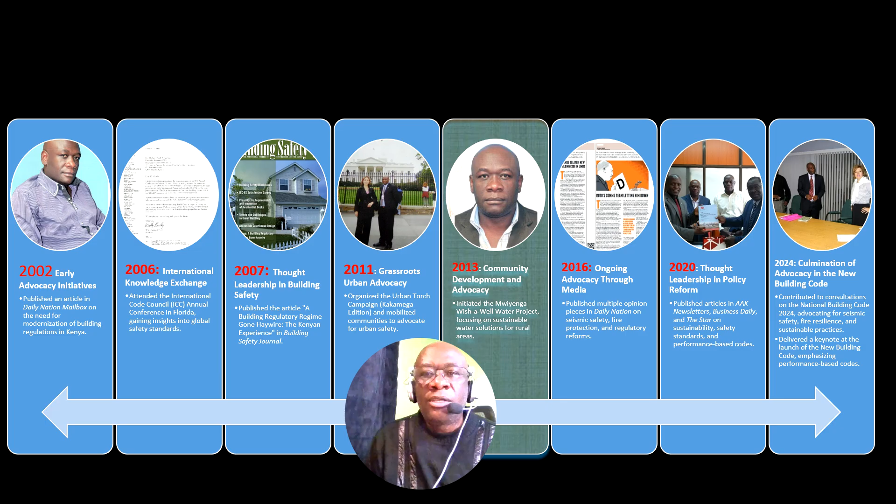Locally, I've been at the forefront of grassroots advocacy, and in 2011, alongside my friend Humphrey Buradi, we launched the Urban Torch campaign in Kakamega to promote urban development awareness. I also co-founded the Mwiyenga Wish-a-Well Water Project, a community-driven initiative that has received recognition and support from the ICC's Global Membership Council.

Over the years, I've published multiple opinion pieces in leading Kenyan outlets such as the Daily Nation, Business Daily, and The Star, covering topics like sustainability, safety standards, and building codes. My contributions extend to AAK newsletters and participation in stakeholder forums for the upcoming National Building Code 2024, led by the National Construction Authority. These experiences reflect a lifelong commitment to fostering a safer, more sustainable, and forward-thinking built environment in Kenya.

As we proceed, I'll share insights from this journey that tie into the transformative potential of the National Building Code.

So, what are the highlights in the new code? This new code aims to align Kenya's construction industry with global best practices, promoting sustainable and climate-resilient urban development. It incorporates eco-friendly materials and methods while addressing climate resilience, with provisions for seismic safety and adaptable designs to withstand climate impacts. The code also integrates high-standard international building practices, with periodic updates to stay current with global trends.

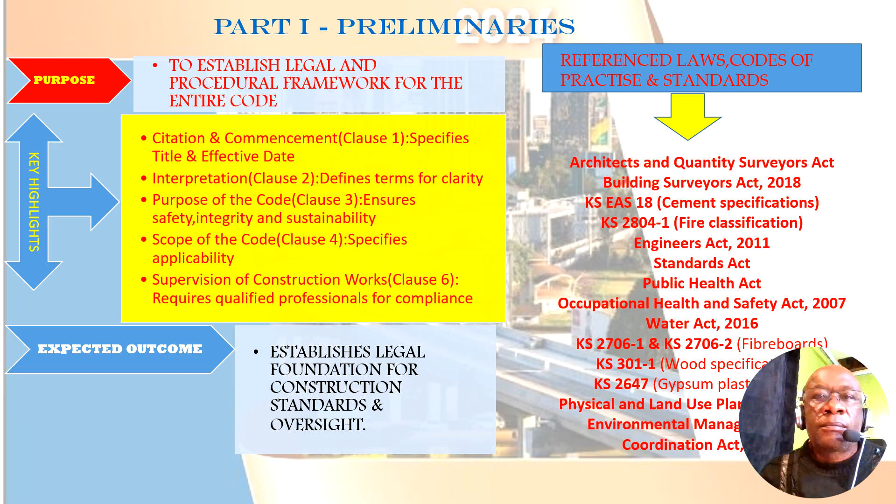Siting and space about buildings.

The 1968 code provided limited guidelines for site selection and spacing. In contrast, the 2024 code introduces zoning principles, environmental impact assessments, and disaster risk considerations, ensuring optimal land use and sustainable urban planning. Key regulations promote organized urban development and safety, compliance with physical planning at Clause 7, ensuring adherence to urban standards.

Space around residential buildings at Clause 14 safeguards privacy and air circulation. Service areas at Clause 11 allocate space for utilities. Obstruction of view at Clause 13 prevents sightline blockages. Building safety at Clause 33 eliminates hazards to the public.

There are standards like KS 548 for precast pipes, KS 2112-1 for electrical installation and security installations, and KS 2112-2 for access control and non-lethal security fences, enhancing infrastructure safety and efficiency.

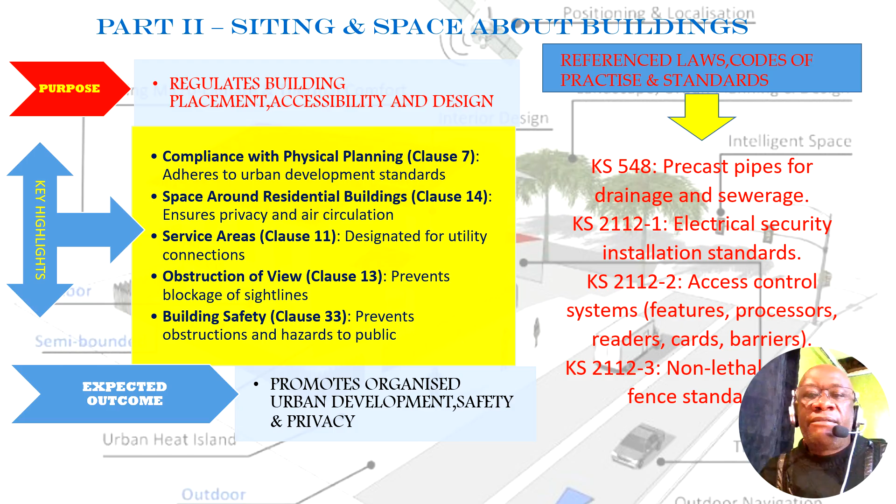Part 3, parking spaces. Parking standards in the 1968 code were basic, reflecting low vehicle ownership at that time. The 2024 code introduces a forward-thinking framework to meet modern urban parking demands.

Some clauses include electric vehicle charging stations promoting sustainable energy use, multi-level parking designs optimizing urban land usage, and accessibility provisions at Clause 39, ensuring inclusive infrastructure for all users. Key regulations ensure parking is safe, efficient, and functional.

Parking requirements at Clause 35 establish minimum spaces based on building usage. Vehicular circulation at Clause 36 is designed for smooth traffic flow. There is also the introduction of charging ports for electric vehicles.

Clause 38 supports the shift to green energy. Pedestrian guarding at Clause 39 protects pedestrians from vehicular traffic. Vehicle ramp design at Clause 42 regulates ramps for safe access.

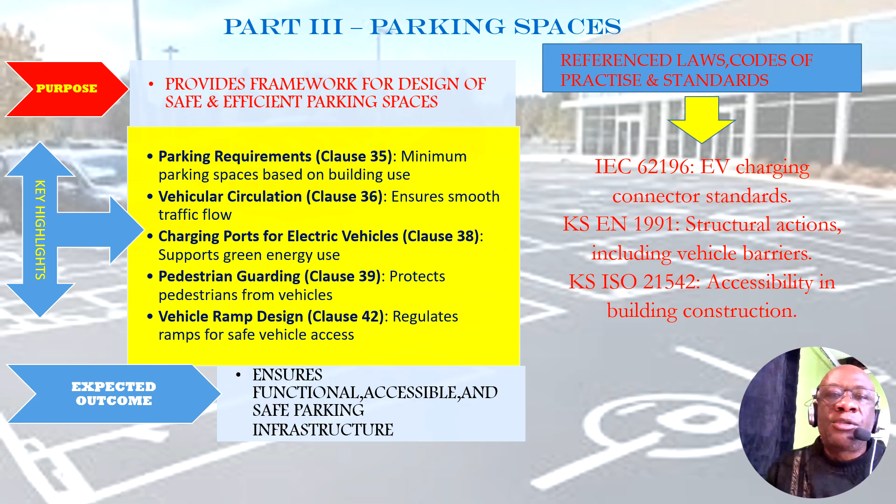These are supported by international and local standards, including IEC 62196 for electric vehicle charging connector standards, KS EN 1991 for structural actions for safety including vehicular barriers, and KS ISO 21542 for accessibility in building construction.

Part 4, preparation of construction sites. Site preparation under the 1968 code was basic, focusing solely on clearing and leveling. The 2024 code broadens the scope to integrate modern environmental and safety considerations, ensuring sustainable development and worker welfare.

Key highlights include site protection at Clause 47, which ensures construction sites are secured for safety. Damage to public utilities at Clause 48 makes contractors responsible for repairing any damage to public infrastructure. Soil quality at Clause 51 mandates testing soil suitability for foundations to prevent structural failures.

Dust and noise control at Clause 52 protects public and worker health through strict air and sound pollution measures. Site facilities at Clause 57 requires the provision of water and sanitation facilities for worker welfare.

The supporting standards and regulations for this chapter include KS ISO 11074, vocabulary and standards for soil quality, KS 999, soil testing methods for civil engineering purposes, the Environmental Management and Coordination Air Quality Regulations 2014, which governs air quality on and around construction sites, and KS 662, standards for safe electrical installations on construction sites.

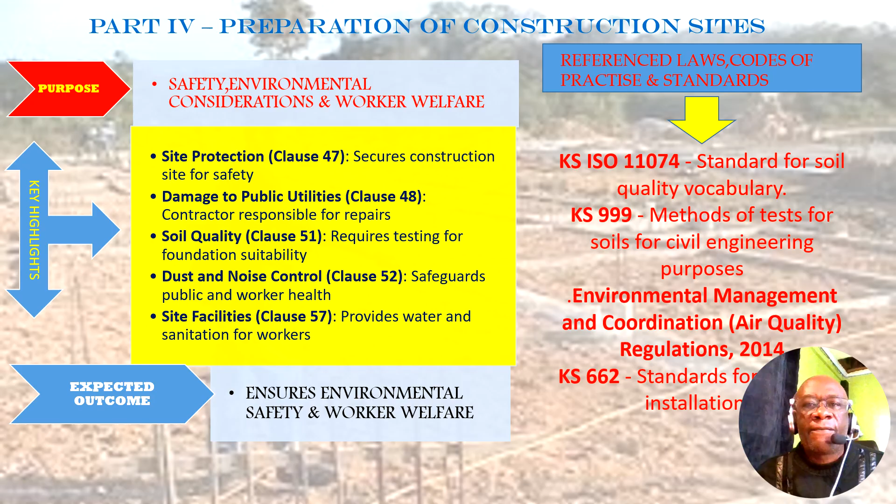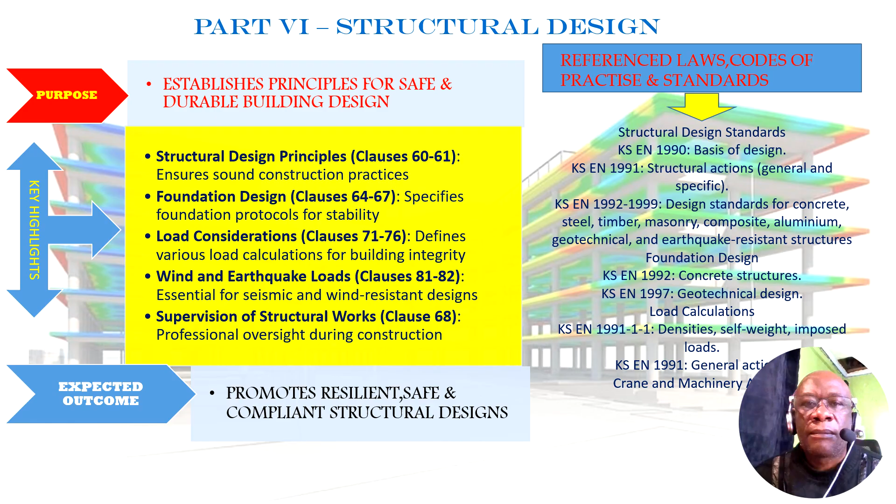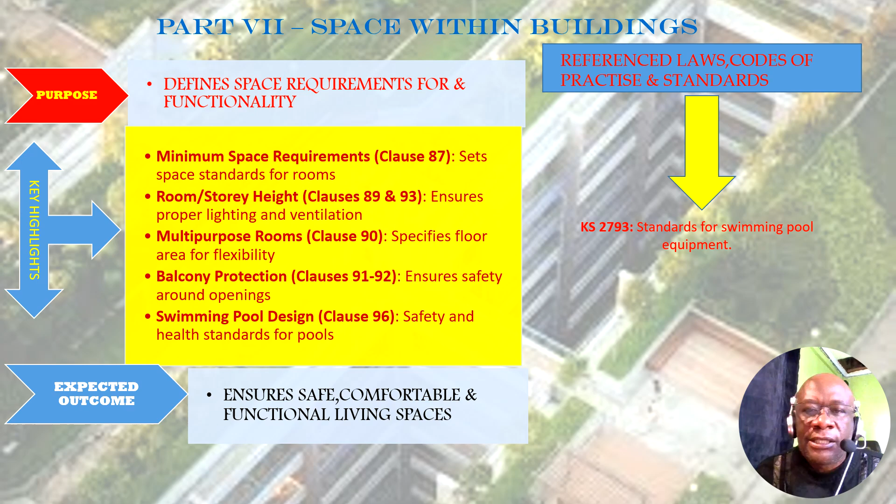Next, we'll delve into how these space requirements integrate with overall design to enhance safety, comfort, and adaptability. Chapter 8 deals with floors.

The 1968 code emphasized durability in floor construction, but did not consider comfort factors like acoustic performance. The 2024 code incorporates these elements, ensuring floors are not only stable but also energy efficient and comfortable.

Key highlights in the floor chapter include general floor construction at clause 97, ensuring floor stability for long-lasting performance; black cotton soil considerations at clause 98, addressing special soil expansion issues to prevent floor movements; and timber floor standards at clause 100, ensuring the stability of timber floors while factoring in material behavior.

The floor chapter also has supporting standards, including KS 1002, anti-termite pre-construction treatment; KS 1003, anti-termite treatment for existing buildings; and KS EN 1995-1-1, which deals with timber structure design standards.

So why does this matter? The 2024 code promotes structural integrity in floor construction, ensuring safety, durability, and comfort through better thermal and acoustic performance.

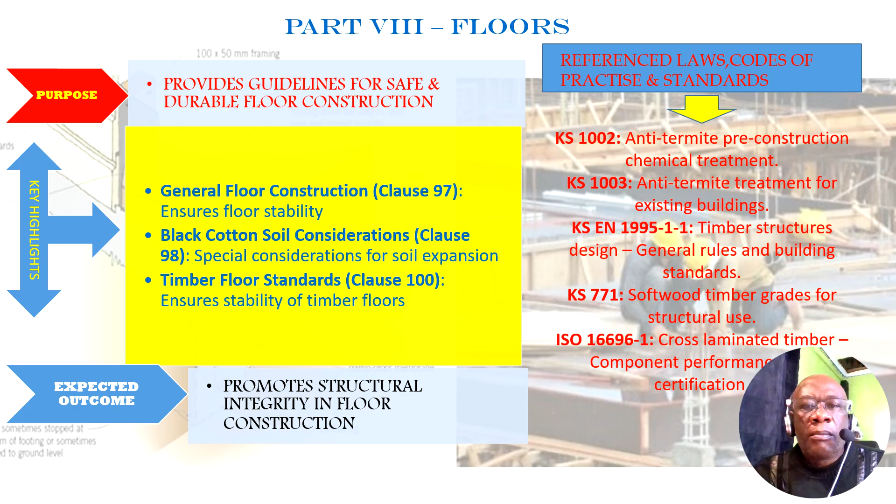Chapter 9 deals with walls. The 1968 code prescribed basic structural requirements for walls, but the 2024 code goes further by incorporating thermal insulation, energy efficiency, and advanced materials like composite panels, addressing modern construction needs.

Key highlights in this chapter include wall design and functionality, ensuring structural strength, stability, and fire resistance for safety; moisture and weather protection, guaranteeing that walls resist environmental factors such as rain and temperature extremes; and wall types, specifying requirements for external, foundation, retaining, and separating walls.

Supporting standards for this chapter include KS 547, burnt clay building block specification; KS 625, precast masonry unit specifications; KS EN 1995-1-1, timber structure design rules; and KS 771, softwood timber grade specification for structural use.

Why does this matter? The 2024 code ensures stable, durable, and safe wall construction that enhances energy efficiency and climate resilience through modern materials and practices.

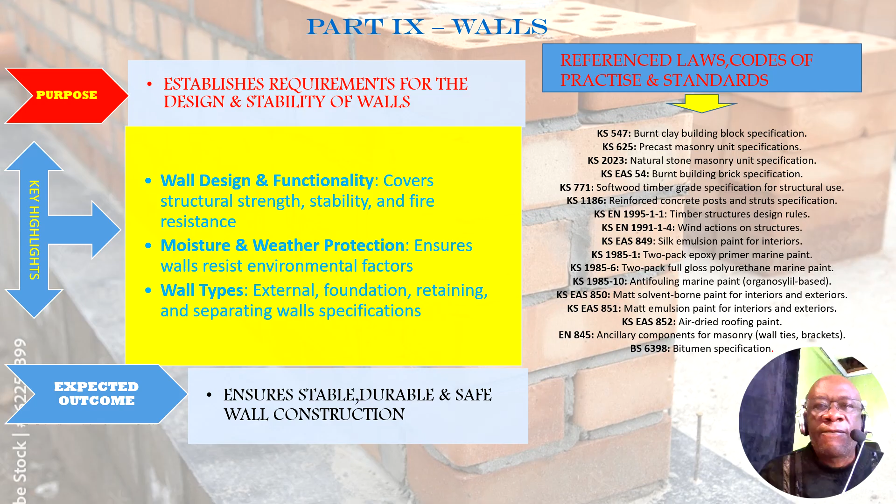We are on chapter 10, lighting and ventilation. The 1968 code focused on natural lighting and ventilation, but it lacked the depth and innovation needed for modern building standards. The 2024 code integrates energy-efficient artificial lighting and advanced ventilation systems, ensuring comfort, health, and energy conservation.

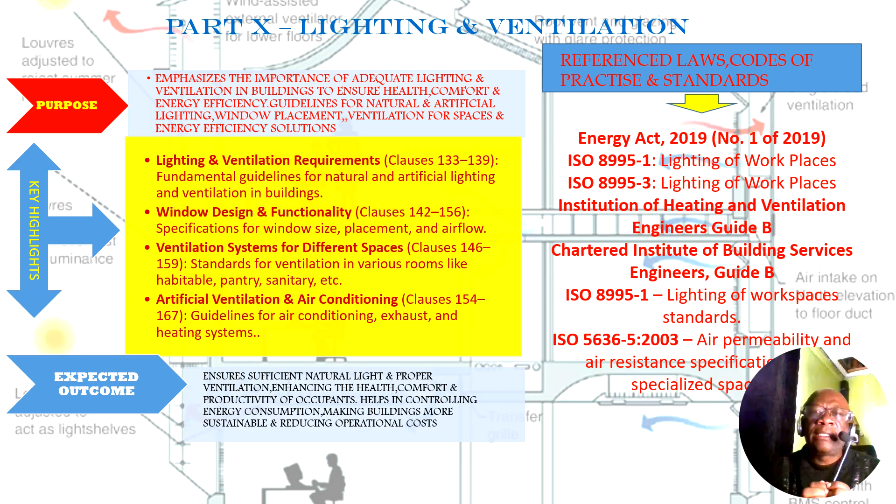Key highlights include lighting and ventilation requirements at clauses 133 to 139, providing fundamental guidelines for both natural and artificial lighting and ventilation; window design and functionality at clauses 142 to 156, setting specifications for window size, placement, and airflow to optimize lighting and ventilation; and ventilation systems for different spaces at clauses 146 to 159, defining standards for ventilation in habitable rooms, pantries, sanitary areas, etc.

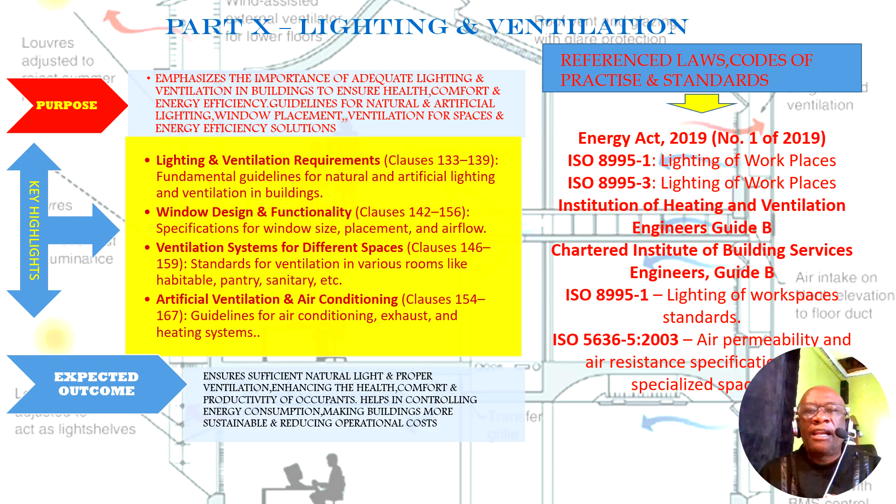There is also artificial ventilation and air conditioning at clauses 154 to 167, addressing air conditioning, exhaust, and heating systems for enhanced comfort. Supporting standards for this chapter include Energy Act 2019, number 1 of 2019, which governs energy efficiency in buildings, and ISO 8995-1, lighting of workspaces standards.

There is also ISO 5636-5:2003, air permeability specifications for specialized spaces. So why does this matter? The 2024 code ensures adequate natural light and proper ventilation, boosting the health, comfort, and productivity of occupants while controlling energy consumption for more sustainable, cost-effective buildings.

Chapter 11, we are on glazing and cladding.

The 1968 code had minimal focus on glazing and cladding systems, overlooking key safety and aesthetic considerations. The 2024 code addresses these concerns by specifying safety standards for tempered glass and promoting energy-efficient cladding materials, aligning

with modern architectural trends. The key highlights include types and installation of glazing, clauses 172 to 175, which sets safety requirements for glazing materials and installation practices.

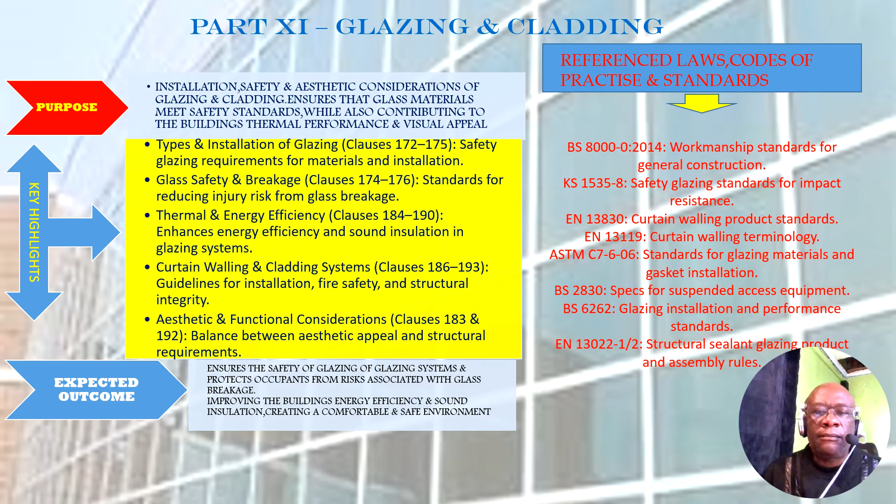Chapter number 12, we have staircases, lifts, and escalators. The 1968 code addressed staircases but lacked comprehensive guidelines for lifts and escalators.

The 2024 code introduces advanced safety and design considerations for all vertical transportation systems, ensuring accessibility, reliability, and improved emergency preparedness.

The key highlights in this chapter include staircase design at clauses 194 to 203, which specifies dimensions, handrails, and landing design to enhance accessibility and safety.

Then we have means of escape at clause 198 and 202, which establishes safe evacuation designs in line with safety standards to ensure quick and efficient exits in case of emergencies.

Then we have lifts and escalators, clauses 215 to 219, which provides comprehensive safety measures for lifts and escalators, improving accessibility for all users. Then we have firefighter access, clause 199, which ensures staircases are easily accessible for emergency services,

enhancing response time in fire emergencies. Then we have machine pulley room, clauses 227 to 234, which details the installation requirements for lift machine rooms, ensuring proper functioning and safety.

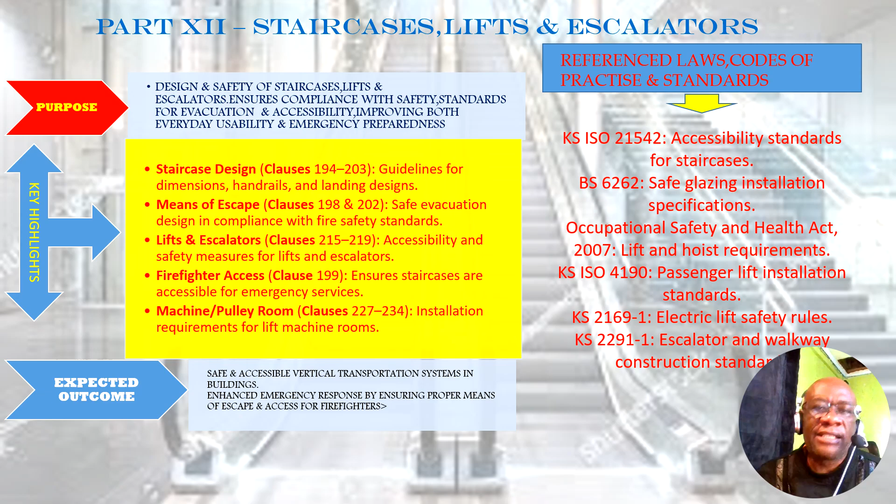We are on the chapter on roofing. The 1968 code focused primarily on basic weatherproofing for roofs.

In contrast, the 2024 code expands its scope to include thermal insulation, energy efficiency, and the integration of renewable technologies like solar panels to enhance building performance.

The key highlights here include roof construction, clause 237, which outlines material selection and ensures structural integrity for roofs, addressing long-term durability.

Then there is the roof component design and installation at clause 238, which sets guidelines for the durability and safety of roof components, enhancing overall roof performance.

Then there is the timber for roof construction, clause 239, which provides criteria for selecting timber, particularly focusing on fire resistance, ensuring safe roofing materials.

Then we have fire safety of roofing materials at clause 240, which establishes fire resistance standards for roofing materials, helping to prevent fire hazards.

We have waterproofing and flashing, clauses 241 and 242, which details proper waterproofing methods and installation procedures to prevent water damage and maintain building integrity.

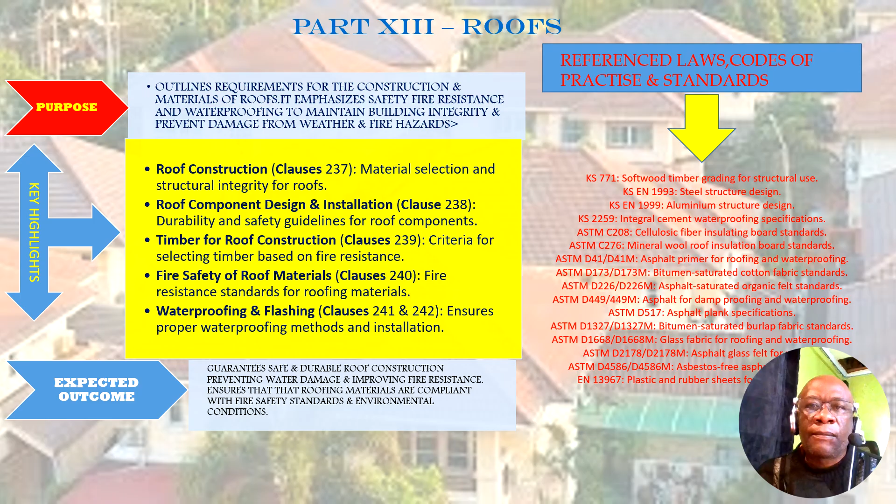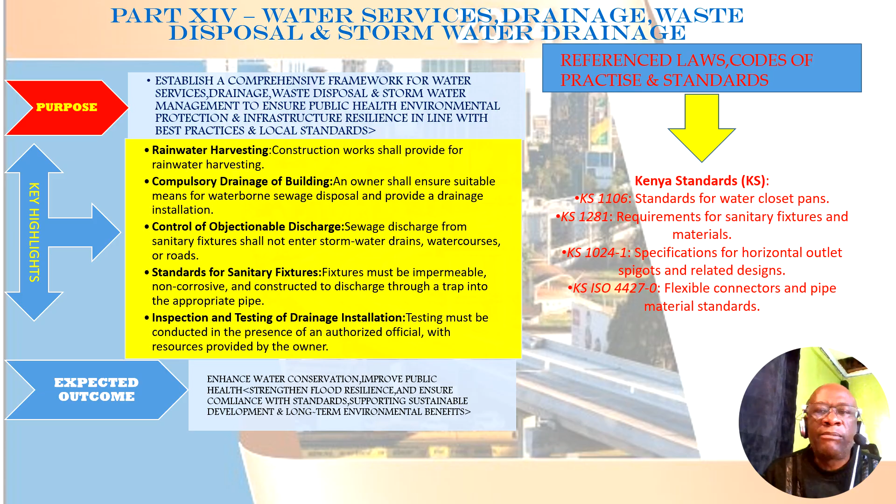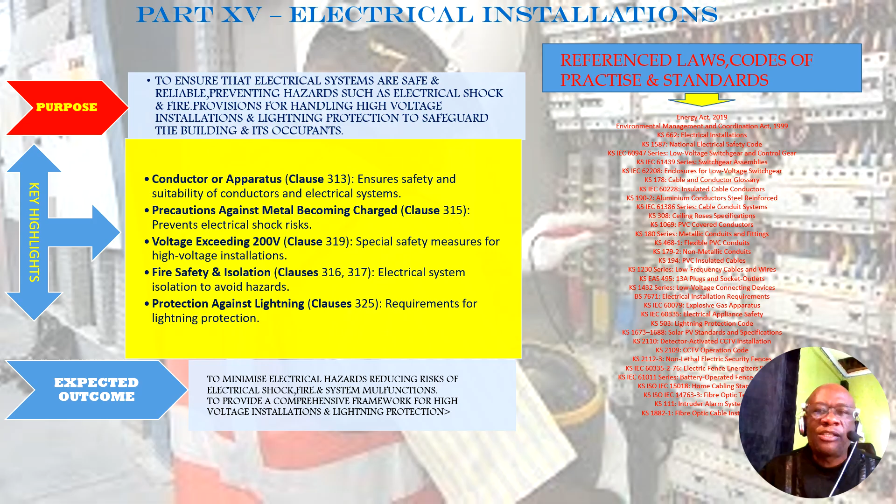Why does this chapter matter? The 2024 code reduces risks of electrical shock, fire, and system malfunction by introducing advanced electrical installation practices and safeguarding high voltage systems with a special focus on integrating renewable energy solutions.

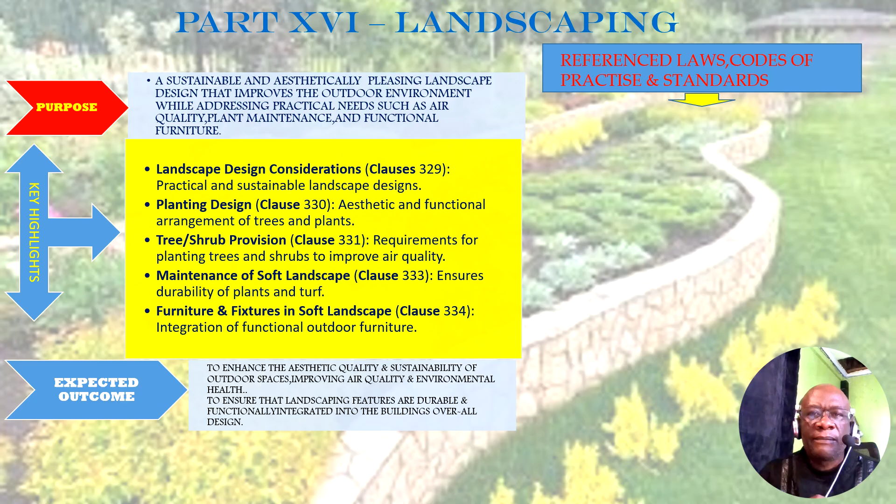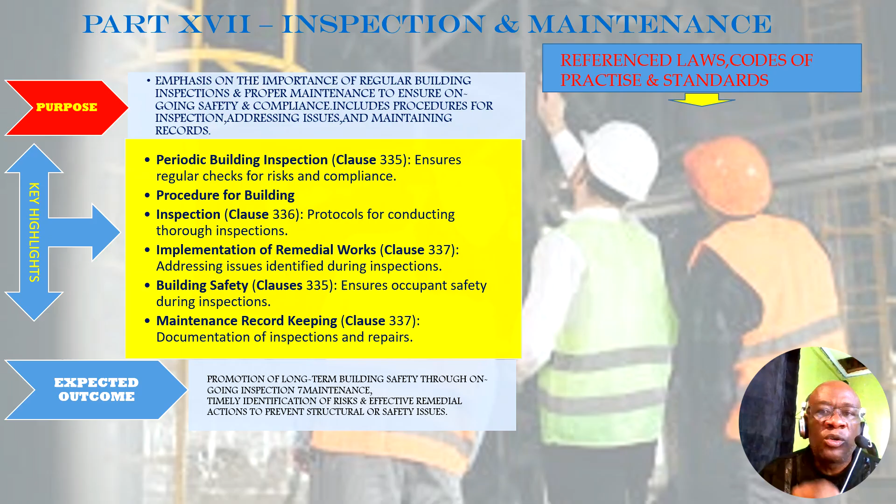So why does this chapter matter? By emphasizing ongoing safety and compliance, the 2024 code ensures that buildings remain safe and functional throughout their lifespan, fostering a culture of proactive maintenance and timely interventions.

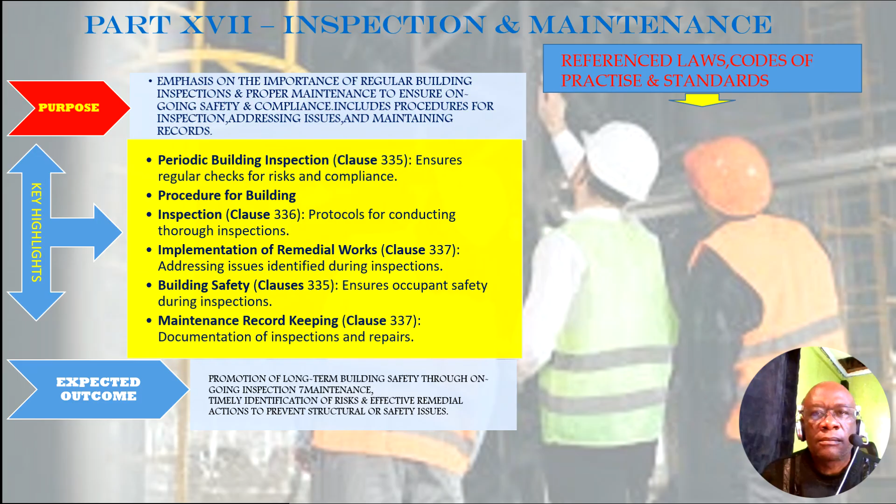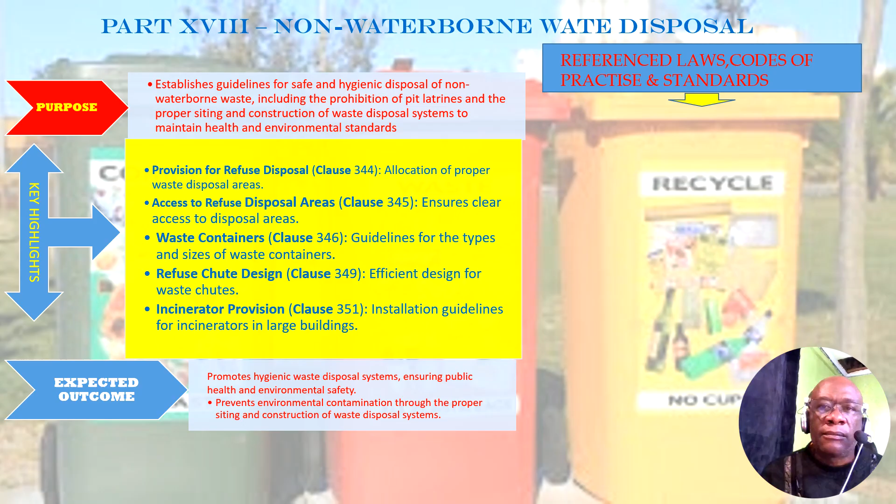Chapter number 19, Refuse disposal. So we are looking at enhanced waste disposal guidelines.

In the 1968 code, refuse disposal was treated generally without specifics for waste segregation, recycling, or sustainability. The 2024 code provides detailed guidelines for managing waste, emphasizing segregation, recycling, and sustainable disposal to enhance building hygiene and public health.

There are key highlights, which include provision for refuse disposal at clause 344, which specifies designated areas for refuse disposal to ensure proper waste management and cleanliness. Then we have access to refuse disposal areas at clause 345, which guarantees that these areas are easily accessible, making waste collection efficient and hassle-free.

Then we have waste containers at clause 346, which sets clear standards for the types and sizes of containers used, promoting proper waste storage and reducing contamination risks.

We have refuse chute design, which provides guidelines for the safe and effective design of waste chutes, especially in multi-story buildings. We have incinerator provision at clause 351, which sets out guidelines for installing incinerators in large buildings, ensuring proper handling of waste that cannot be easily recycled or composted.

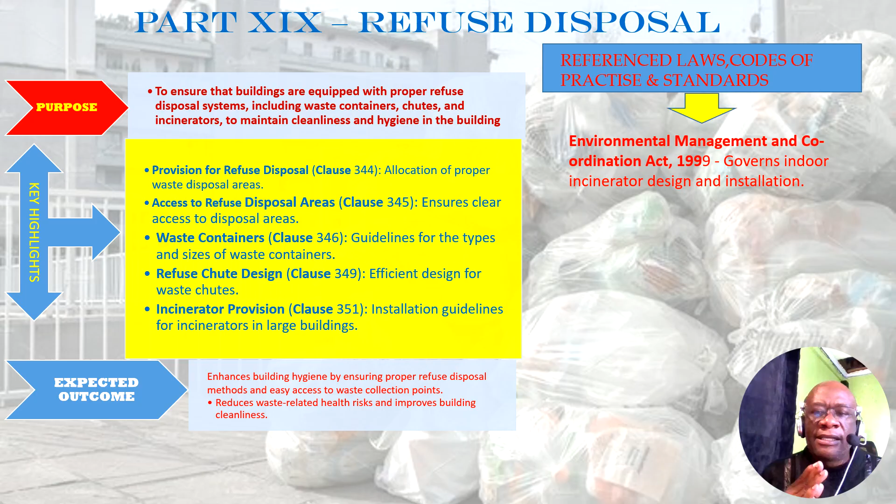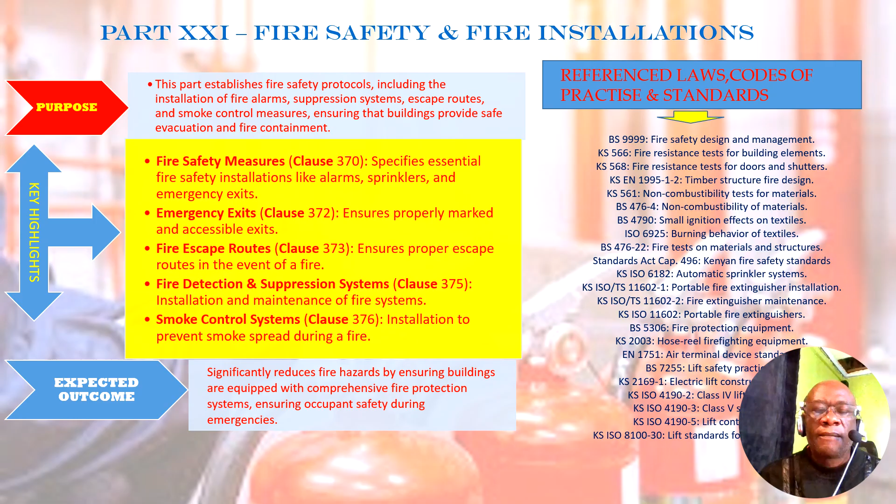On fire safety and fire installations, the 1968 code primarily addressed basic firefighting measures such as fire extinguishers and simple exits.

The 2024 code introduces advanced fire safety measures, including comprehensive fire detection, suppression systems, and well-planned evacuation routes to better safeguard building occupants. So we have some key highlights, which include fire safety measures at clause 370, which mandates essential

fire safety installations such as alarms, sprinklers, and accessible emergency exits to effectively manage fire risk.

Clause 372, emergency exits, which specifies that emergency exits must be clearly marked and easily accessible for swift evacuation in the event of a fire.

We have fire escape routes at clause 373, which outlines the proper design of escape routes, ensuring safe and efficient exit paths during a fire emergency.

Then we have fire detection and suppression systems, clause 375, which focuses on the installation and maintenance of fire detection systems, that is alarms, and suppression systems, that is sprinklers, to control and reduce fire hazards.

Then we have smoke control systems at clause 376, which ensures the installation of systems to control the spread of smoke, crucial for maintaining safe air quality in evacuation routes.